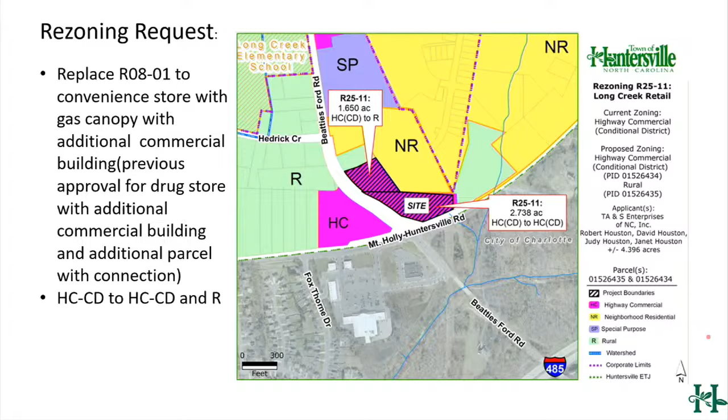As Mr. Henson said, this is a conditional district rezoning of about 4 acres down on the corner of Mount Holly-Huntersville and Beatties Ford Road. Back in 2008, the site was originally zoned from rural to highway commercial conditional district for a drugstore with some outbuildings, and it's been that way since 2008.

You can see the context map here, located at the northeast corner of Beatties Ford Road and Mount Holly-Huntersville. To the west, there's another approved plan for some commercial, and south of Mount Holly-Huntersville is the city of Charlotte. You see the shopping center with the Food Lion, and on the southeast corner there's going to be some construction as well. To the north, we've got the Oak Grove Hill Farm subdivision under construction, as well as some other projects in the area.

As part of this application, they are requesting some modifications. The largest is for impacting the 30-foot buffers. Buffers are supposed to be untouched, but in this case, due to grading, they're asking for that modification. Staff has some concerns with the slopes and the ability to replant, as well as the ability to connect back up to the north if that parcel were to come back in for development.

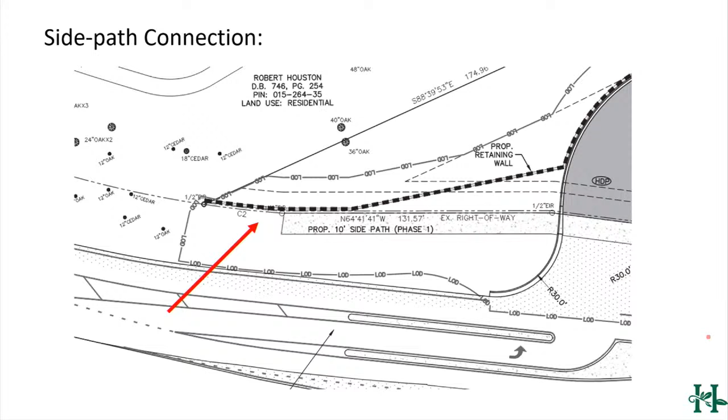In relation to how this plan fits into the Huntersville 2040 plan: it's a great spot for this use, so it's in support of Land Use Policy 5.1, but not supported for several other items listed as well. The biggest thing is if you look at the small area plan, the 2040 plan, this is supposed to be an urban village where things are connected. This property and project is isolated, and we have concerns about its ability to connect to the north.

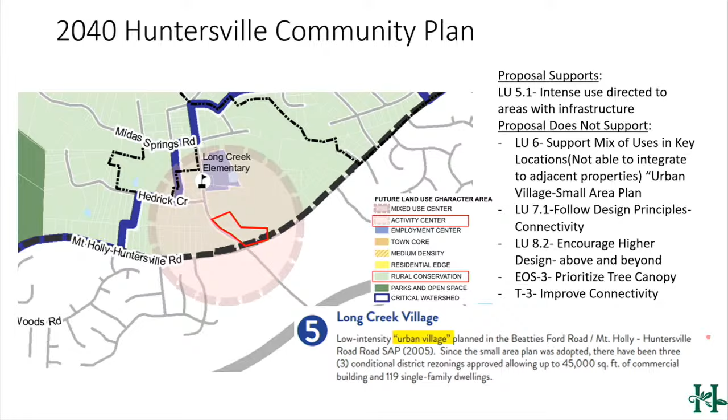So that all being said, staff is not in favor of this at this time. If they were to make some changes to the plans, we could be in support, but that's where we stand today, and I'm here if you have any questions for me. If not, the applicant is here as well.

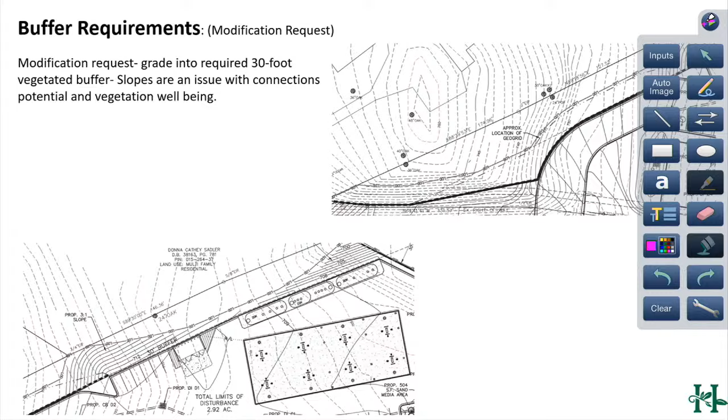So your suggestion would be to raise the grade of the convenience store, the entire lot? Is that your solution? I am not an engineer, and I don't want to play one on TV. But there are things you can do to manipulate the earth to make it less impactful, a better situation, kind of a middle ground between the two parcels.

On that subject, how do you determine the onus of the grading? Would not the property to the north have more ownership since they own more of the slope, if they went to develop it? How do you put the onus all on the current applicant? Good planning and engineering practices.

In the past, we have been at fault only reviewing the applicants and not looking far enough off-site, and there could be negative impacts on those properties. There are several cases where we've been challenged with that. So under my regime, we've taken it under consideration to look at off-site impacts or potential future off-site impacts, to try to mitigate those to a reasonable level. Again, that's just professional judgment. But in this case, the crown is on...

In this case, the crown is on the property to the north, right? Correct. They could shave off, I don't know how many topo lines, maybe five, to get to the same grade as the back of this lot. There's more than that, because you've got a retaining wall that extends down along here.

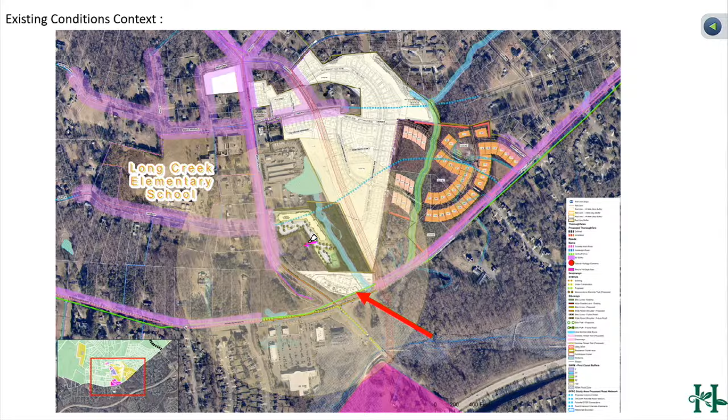Thank you. Yes sir. Michael? Yeah, just trying to align what we're doing at the town level with the state, because usually the state building code would normally dictate what's required in grading. How does what we're doing align with what the state building code will call for when it comes to grading?

There's no issue with state building code and grading. State building code deals with the structure and how it's occupied. No, specifically it says that grading should be done to avoid creating hazards and adverse effects, grading in isolated areas which would not damage the public or negatively affect the neighbors. So they go into a great deal of detail about what grading is and how it's to be considered.

And it's a whole section at the state level. I would think the context may be, don't create something that would be negative, but the connectivity, not being able to connect this, is probably a local zoning code issue rather than like if you were to create something that would wash onto somebody else's property. That would be, I think, a fair assessment.

So if you were to grade this and change the direction of water, it would cause a flooding condition downstream or negatively affect your neighboring parcel. That could be considered in that context.

But you also made reference to a bit of a policy change by making reference to it under your regime. So under the prior regime, how was it considered? We looked at it very isolated. We made sure the project before us was kept whole, but we did not really look at how it could have possibly affected the developability of the parcels next door.

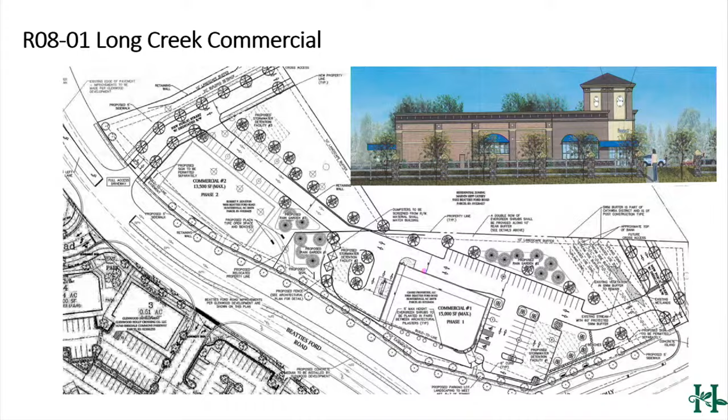As that process played out over time, it became apparent that the Houstons had no idea they were going to develop and couldn't afford to develop the building. So when they figured out they couldn't develop the building, we went to them and said, okay, back out of the proposal. We'll just develop our corner and leave your property as is. And when you get someone to develop your property, if you need an easement to get into our system, we'll give you an easement. But if you decide you want to put a building where that road is, because of the grading you're going to have to do on the property, you go whichever way you want to go. But we will give you an easement to come into us if you want to.

You have to realize at this intersection, it's almost 45 to 60 feet higher from where our building is to where the house is that we've talked about in the past on the Houston property. And if you back up even beyond the Houston property to the Cathey property, that's probably another 30 feet taller.

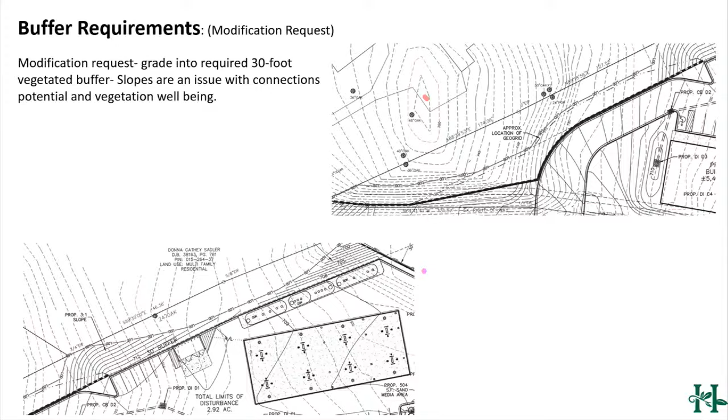Okay, all right, anything else? And same thing for the sidewalk point, we have a grade elevation problem, and we will bond it. When the Houstons grade, we will finish the sidewalk.

Right, yeah, I guess along those lines, the reason we didn't take the sidewalk all the way to the property corner is it's steep, because of the angle of the property line. It's not coming in perpendicular, it's at a pretty sharp angle. So to get that sidewalk in without it basically being... it will not be ADA compliant.

A skateboarder's dream. So are you willing to ask for that modification tonight? Yes, and if we have to bond it, we'll go ahead and bond it until the Houstons develop theirs, and we'll finish the sidewalk. For now, it's just gonna be a steep sidewalk. Wheelchairs will be rolling down it.

Okay, no other questions. Somebody have a motion prepared? Okay, take your time, take your time. We'll keep chatting.

I'll ask a quick question on the traffic impact analysis. I think last time I pointed out the storage as you're coming south on Beatties Ford, specifically in the morning. It seems shorter, a lot shorter than the 2008 plan. It was a couple hundred feet long then, and you kind of truncate it because of where you have to enter that property on the north side. What's the distance of that storage going left on Mount Holly Huntersville, and do you think that's appropriate?

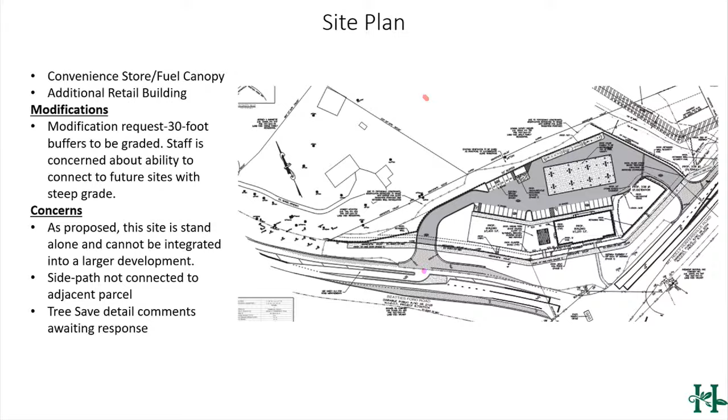I guess my main question is why the dedicated left? Is that a requirement, that dedicated left into your property? Why can't you just have that storage and then have a break in the median going into the north of your property? The left turn lane is a requirement from NCDOT in order to provide a left access into that intersection. So people can't take a left out, I guess. Correct. Right, okay, all right.

Thank you. Okay, I can try. All right, all right.

In considering the proposed rezoning, RU 25-11, the planning board recommends approval with the conditions that future modifications to the grade and the retaining wall would be guaranteed upon further development of the property to the north.

This is essential for guaranteeing connectivity. It is reasonable and in the public interest to approve this request because it is consistent with LU 5.1 of the 2040 plan, allowing for more density where transportation infrastructure and utilities already exist. This gas station will provide valuable services to the existing community.

Second. You have a second? Okay. Question.

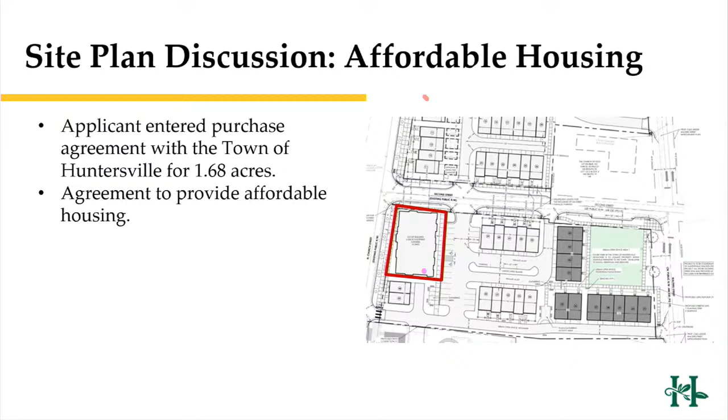And then for the rezoning site, the applicant is proposing 6 urban open spaces: 2 of those will be woonerfs, 2 will be pedestrian passageways, 1 will be a green, and another will be a park. The 2 woonerfs will provide a multi-use access way that prioritizes pedestrians while still allowing slow vehicular usage.

Additionally, those woonerfs will be placed within a public access easement to allow the community to use it as future connections. Staff does recommend that the applicant provide on the rezoning plan how they're going to amenitize their woonerf in order to meet ordinance requirements.

And here are the elevations for the townhomes. And the elevation for the apartment building.

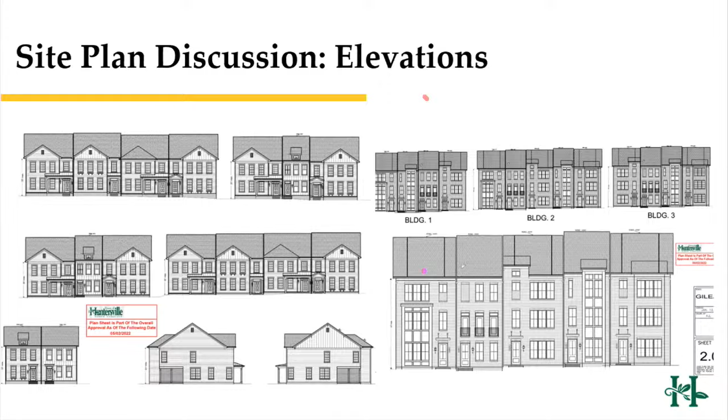So the applicant does have 6 modification requests. Staff is in support of all 6 modification requests. I'll quickly go through a few of them.

The first is to the yard trees. The applicant does plan to provide yard trees only where space is allowed. Next, the applicant is asking to increase the amount of attached housing from 30% to 100%. The next modification is to reduce the required buffer to 0.

The next is to the rear setbacks, which is to allow a variable rear setback that is less than the required 35 feet, and additionally to allow less than the 20 feet of required separation from detached garages. The next modification is to increase the height from the max requirement by 3 feet.

And the last modification is to the on-street parking. They are asking to not provide on-street parking for this attached housing type. Staff, again, is in support of all these modifications as they are consistent with the increased density proposed by the downtown master plan.

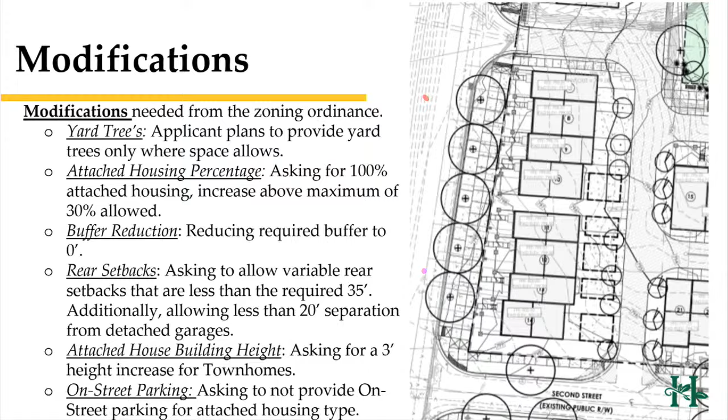And here is the location of the site over the 2040 Huntersville Community Plan. The site is located within the mixed-use center and the town core. These are all the policies that support the plan. I won't go into each policy. One I will highlight is policy LU 8.2, which calls to encourage higher design standards.

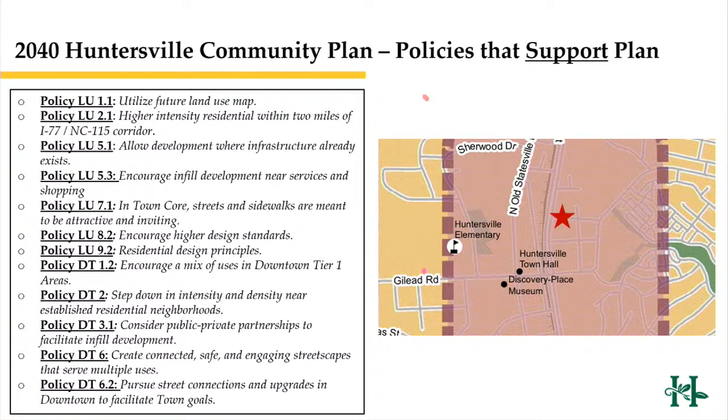As part of that, this site is only required to provide 1 urban open space. The applicant is providing 6 quality urban open spaces while also providing some additional aesthetic elements to the project that go above and beyond the minimum standards of the ordinance.

The downtown master plan also supports this project. The red rectangular box shows the site of the project over the downtown master plan. This area calls for a mix of apartments and attached housing, as well as allowing between 2 to 3, or suggesting 2 to 3 stories in height.

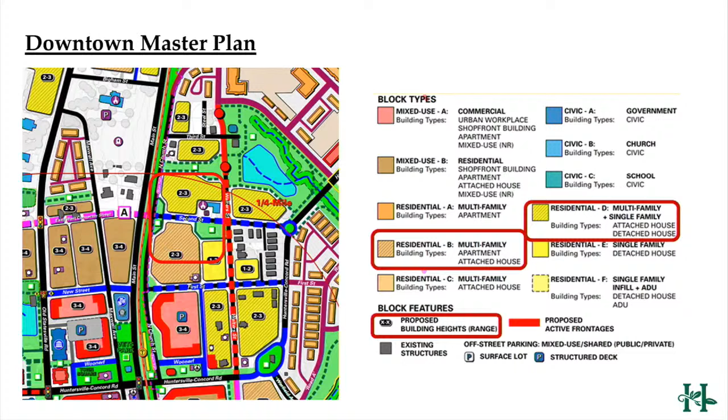The downtown master plan also goes into further conceptual detail, showing 2 connections, one of them a woonerf, as well as a park at the corner of 2nd Street and Walters Street. The rezoning plan does meet the intent of this conceptual portion of the downtown master plan.

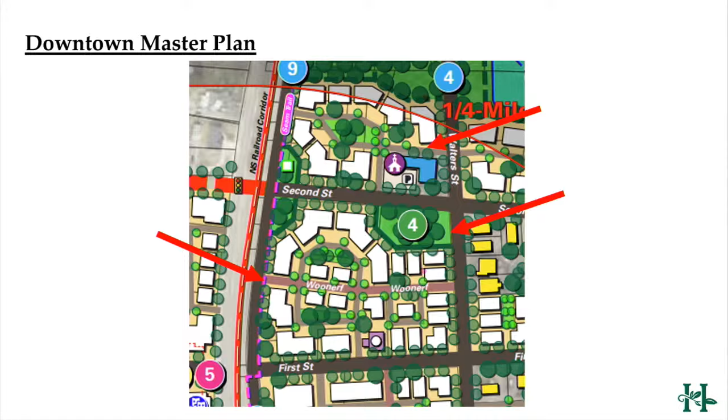Staff is in support of this rezoning. We have just 2 recommendations: one is to provide all of the amenities that are going to be needed for the woonerf, as well as answering all of the remaining staff comments and issues. And just to clear things up, because I believe there was a little bit of confusion, all the stormwater issues that were previously discussed at the public hearing have been resolved. If you guys have any questions, I can answer those for you.

I believe the applicant does not have a presentation, but they are here. Thank you, Nathan. Any questions for staff?

Tell us what you're looking for in an amenitized woonerf. I'll bring up a slide that shows what our ordinance specifically asks for, as well as what our design guideline speaks to. Some of that is providing a surface that's different than just a paved surface, so pavers, something that is inviting to pedestrians and users of the street, as well as street trees or other landscaping items along the woonerf. Those are just some of the few. So you're looking for elevations or something for the woonerf? Yeah, we're just looking to see what they're planning on doing other than just showing the location of the woonerf.

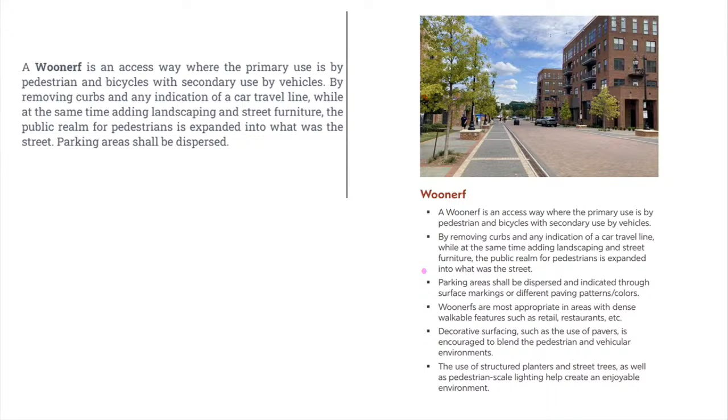I think it speaks highly of the plan when the toughest question you come up with is for the woonerf: is there some way to at least add a design element to it that would reduce the likelihood of vehicular traffic going through more frequently? Sure, so the whole point of the woonerf is mainly to provide safe passage for pedestrians and bikers, but also allowing slow vehicular usage, and by doing that, you're adding bricks, which slow down cars, adding street furniture that prevents speeding along stretches of it. What's included in this application, though? Right now, we're asking for them to show what they're going to do, so to differentiate that.

So the determination was that a TIA was not required, correct? Correct. So I see in the report it states the plan as submitted was for 58 townhomes, and in this current proposal it's 61 townhomes. Is that just an error, or was there a change in the plan? There may have been an increase from the previous submittal, I'll have to look into that for you. I know it's only 3 townhomes, but I assume that wouldn't change the calculus of whether or not a TIA would be required. I believe if they do change it, they may need to look at it again, but I would assume it would not make a difference. Okay, thank you.

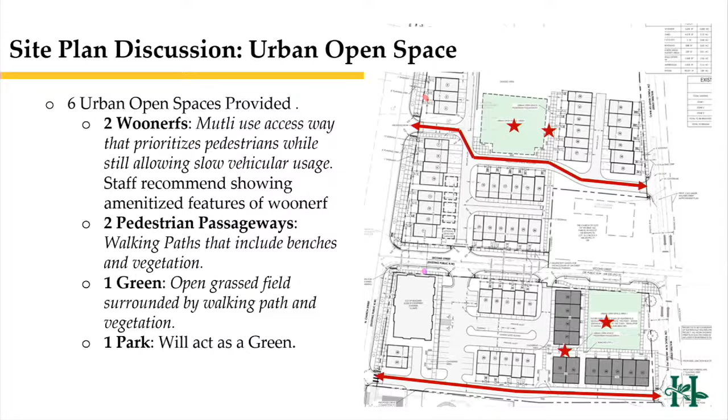So that red building, parking deck in the aerials, that's your property? They're just using it? Well, that's a very thick line, I think that's just a representation, the property line is behind that. That building is not on it, it's completely on the church's property. Well, I was talking about the red building, go back to that aerial, there's a red building to the north of there, red and white.

That's your property, even though it looks like it connects to the church parking lot. Oh yeah, okay, so right where it says 100-109, those two parcels? Yeah, those are currently on our property. Okay, yes, they'll be removed.

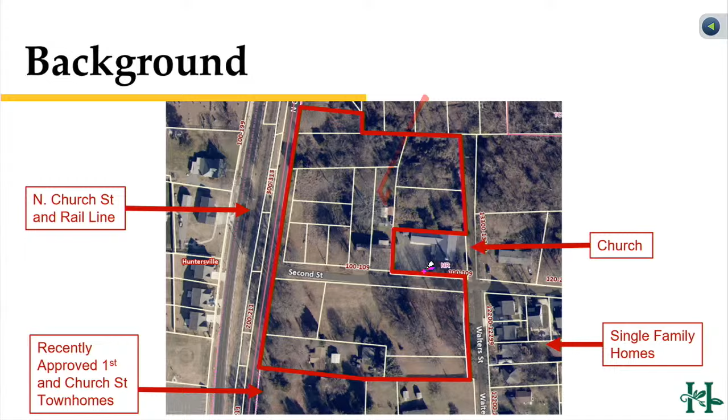So is this the apartments, and is that going to be the footprint? That's the church, that's currently the church. Oh okay, the bottom left, right there, okay. And that's the attainable housing building. Okay, attainable housing, and that is the footprint that is to be?

I mean, it's roughly the footprint, it could deviate. We're donating at least a 7,000 square foot parcel. We have taken a building that represents exactly what will fit in that, with a group that has shown a lot of interest as the recipient of this parcel. Yeah, this is one of a kind, I guess, since we hadn't seen one like this before.

So what's the financial model? It just goes to a co-op and they have it in perpetuity then. And how long is the affordable tag on it for? It's in perpetuity. Perpetuity?

We will continue to work with the town, because when we end up purchasing the property next week, there's clear guidelines of what we have to do. We have to donate to somebody that has to do at least 15 units. We have 7 years to do it. They have to abide by 80 to 120. As we find that recipient we work with, the town will have a say in some of those things, but right now it's in perpetuity. It's not a 15-year or 20-year model.

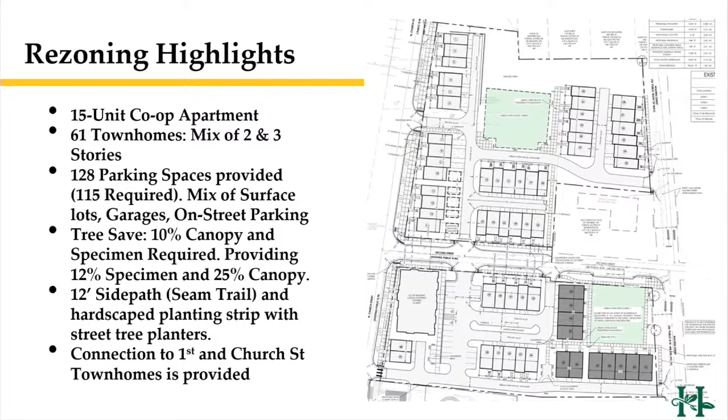All right, any other questions? Can you just give a quick timeline on what construction might look like for this project? With respect to the townhomes, I know the co-op is a little bit of a different story. It'll take probably 6 to 8 months to grade it. By the time we get through permitting, it'll be this time next year will be the earliest we'll probably break ground. From there, once we turn over the parcels, another 6 or 8 months, after that somebody building in 5 to 7 months. So you're probably looking in the middle of 2027. Thank you.

The co-op aspect of it is interesting because those are different kind of creatures than what we typically would deal with, and two things come to mind. One is the actual income constraint. Always a little concerned when you hear income constraint because what it does is disincentivize some people from ever making more money. So is the model to allow transfer of ownership?

That's a great question. That's not something we're getting into on our level because we're going to leave that up to the nonprofit. Our desire is for them to stay in it as long as they can. I know there's other models where you get to a certain income level and then you're kicked out. Right, those will be conversations we have directly with whoever the authority is that we work with. I appreciate that, not a zoning question, but certainly important as part of the project. Thanks.

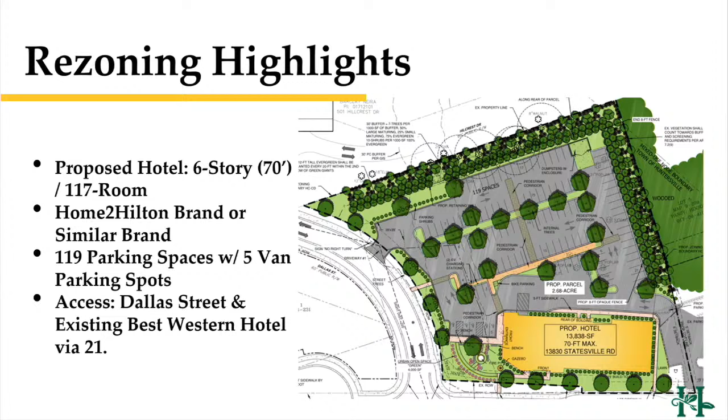The rezoning includes a 70-foot, 117-room Home2 Hilton brand hotel. It includes 119 parking spaces with 5 van parking spaces. Access to the site will be off of Dallas Street and from the existing Best Western via Highway 21.

At the corner of the site at 21 and Dallas Street, the applicant is proposing a 4,000 square foot urban open space, including a fire pit, gazebo, walking paths, and benches. This urban open space is currently shown within a stormwater drainage easement, so we need the applicant to confirm NCDOT is okay with these items being placed there.

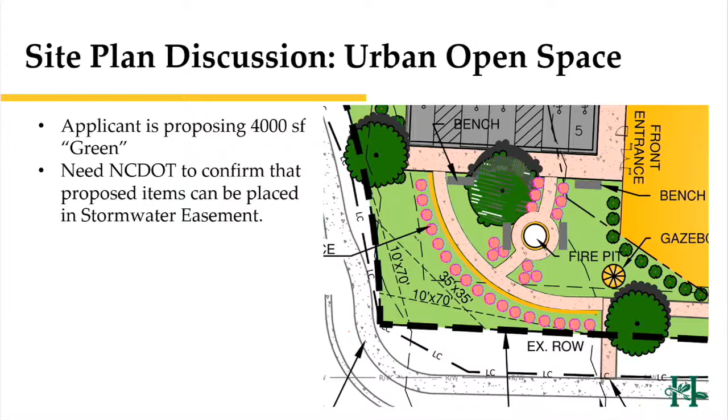Next is buffers. The applicant is providing the full required 30-foot buffers and proposing to increase plantings above the minimum ordinance requirements, increasing the required 4 trees to 7 and the 7 shrubs to 10. Additionally, they are looking to provide a 12-foot evergreen every 20 feet to add additional height to that buffer.

The applicant is requesting a modification to grade within the buffer selectively. Staff could be in support of this modification; we just need more clarity on exactly what existing vegetation is going to remain, since the current landscaping plan shows the entire buffer will be replanted.

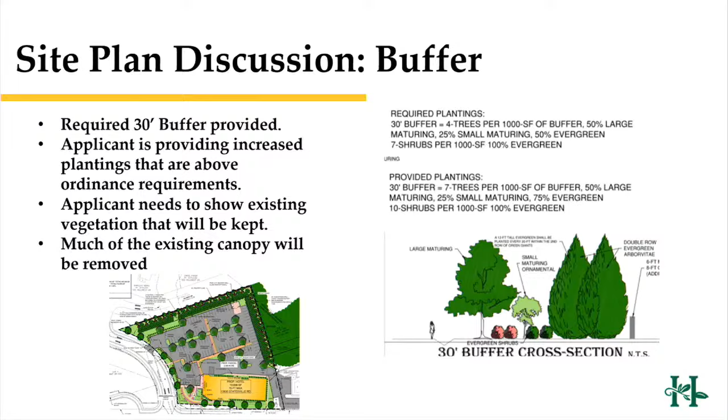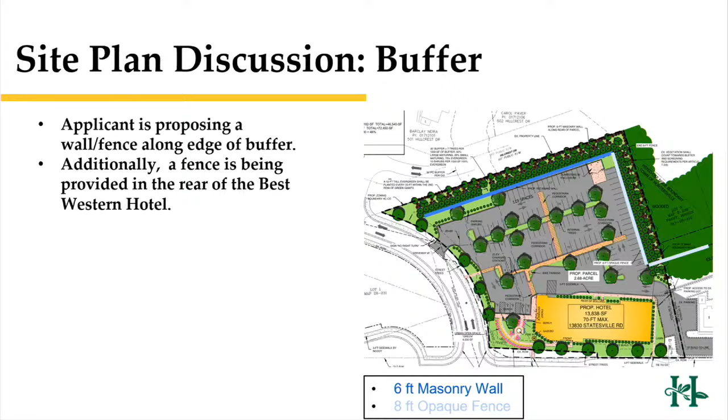A retaining wall is proposed along the eastern edge of the parking lot and that 30-foot buffer. At its tallest portion, it's about 10 to 15 feet above the buffer, decreasing the farther south you go. Staff does have some concerns relating to the retaining wall negating some of the benefits of that buffer.

Some of the initial buffer plantings would be about the height of that retaining wall, and you wouldn't see some of that tall growth until full maturity.

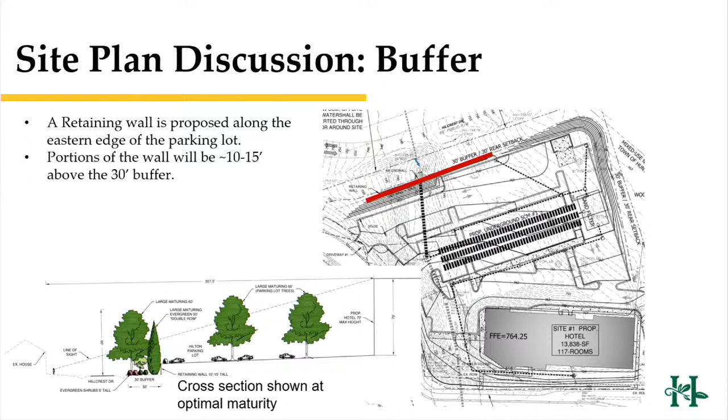The applicant does have 6 modification requests. The first 3 requests involve increasing the height of the hotel from the 36-foot maximum to 70 feet. That increase in height would require a separation between the hotel and the nearest portion of a residential property by 210 feet. The applicant is requesting to reduce that separation to 100 feet. Staff is currently not in support of those 3 modifications, as the increase in height is not commensurate with the decrease in that separation from the residential properties.

Then we have the remaining 3 modifications, which we could recommend or we do support in some cases. As discussed earlier, there's the buffer modification request, which we could support if they provide us some of that information, since they are providing us an increased number of plantings that go above and beyond the minimum requirements of the ordinance. The next modification request is to the hotel location.

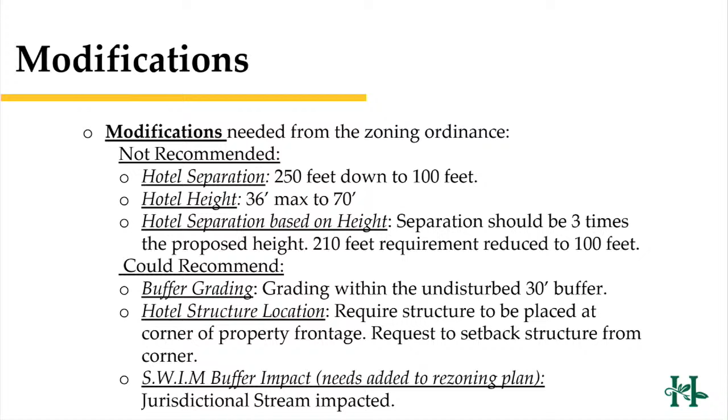The 2040 Huntersville Community Plan does support the use and the general location of this project. It is located within an employment center and on the edge of the mixed-use center future character area. The 2040 Huntersville Community Plan policies LU 6.2, LU 5.2, and LU 2.1 do support this project, as the project's located on a major thoroughfare and within the higher intensity uses that are allowed within the 2-mile I-77 and NC 115 corridor.

Policies LU 8.2 and policy 11.1 do not support the project, as the current design doesn't go above and beyond the ordinance minimums, and in order for that we need the full detailed elevations to be provided. Additionally, the decrease in distance between the residential neighbors and the increase in the height of the hotel are not generally compatible with the nearby neighborhood.

Staff would not be able to support this project without a combination of the following recommendations being met. The first is to lower the height of the building. Second is to lower or adjust the retaining wall and grading so as not to compromise the buffer. Another is to provide a wider buffer, and then provide increased excellence in design, and then to provide that stream mitigation plan as a condition on the plan.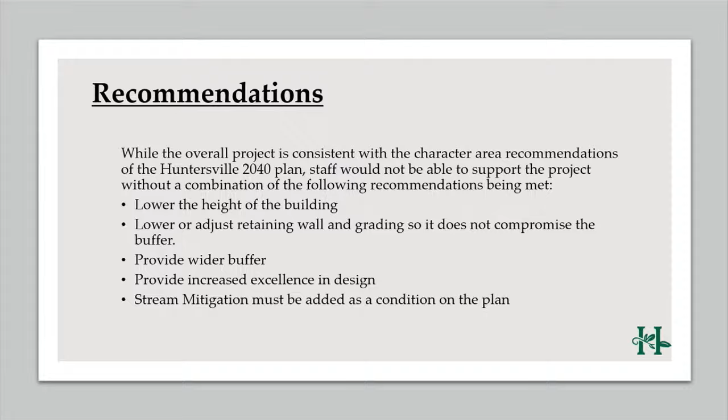And if you have any other questions, I can answer those. The applicant is also here and has a presentation as well. We'll start with questions for staff.

Yeah, the Best Western to the south, do you have on hand the elevation of that building by chance, or approximation? Exact elevation of that. I've been looking through all of our plans and I haven't been able to track that down yet. So that's something we're still looking at. Okay. So that's all I have. Thank you.

Just to confirm, so the house that's currently there, that's immediately behind where this is going to build, that one is part of the rezoning, correct? The plan is to remove that house. The next lot is vacant. Correct. So the first house that we're talking about, it being too close to, is 503, correct? Well, so for the actual zoning ordinance requirement, it's to the edge of the nearest residential property. It doesn't have to have a home on it.

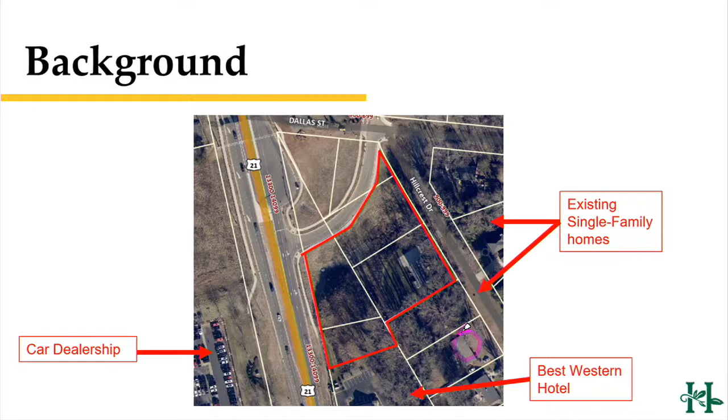But yeah, the nearest house that won't be removed is right here. Right, yeah. Yep, 503 Hillcrest. And that house is closer to the Best Western than this one is going to be, correct? Correct, yep. All right. So just want to make sure I had that. Okay, other questions?

Michael, I'm still trying to form the question. Take your time. I mean, the fact that we're on Statesville, which is kind of a commercial corridor, how does this fit into the full context tonight? Because you look across the street and it's nothing but a bunch of car dealerships, and next door to it is another hotel. Just trying to get a sense for that.

Yeah, so we fully acknowledge that its location along 21 is definitely a positive for the project and for a use of this nature. Currently, our general concern is the impact of the height of the hotel on the neighborhood behind the rezoning site. So it is just a challenging property, given its location.

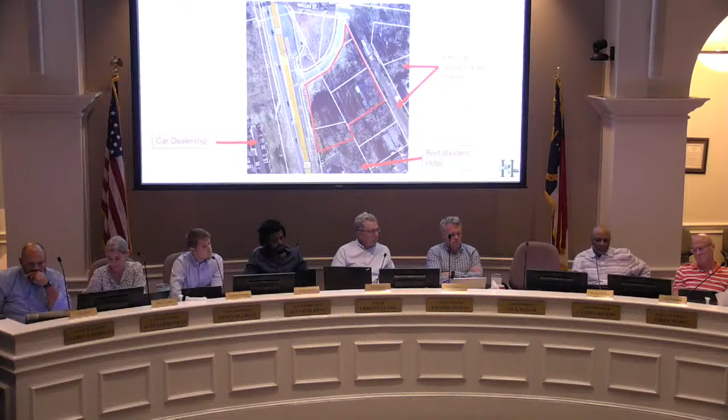So I just want to say, if this were like a smaller boutique-style hotel, you would be for it. If it was 36 feet and they wouldn't need that modification, then yeah, we would likely be for the project. Okay, thank you.

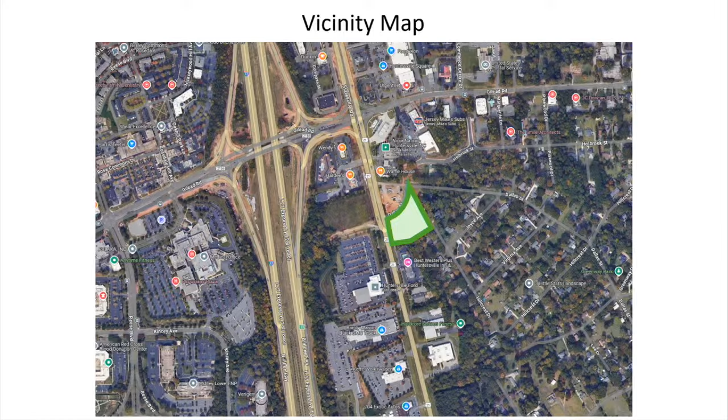I wanted to touch a little bit on the site plan and give you some high points. I appreciate Nathan's summary of the staff report. I do think that after reviewing with staff and going through his report, most of the comments staff has made, the applicant has or will be able to resolve working with staff. The one thing we really can't do anything about is the location of this building relative to the lot.

I'm not sure what it's shown as, lot 5, yeah, here. That is something we could change, and you could make the hotel more at a diagonal. But if you did that, the hotel would then be closer to the 3 lots that are on the other side of Hillcrest. So if you were to change the location of the hotel to this position, you might pull it away from this lot, but then it would be much closer to the 3 lots that are here.

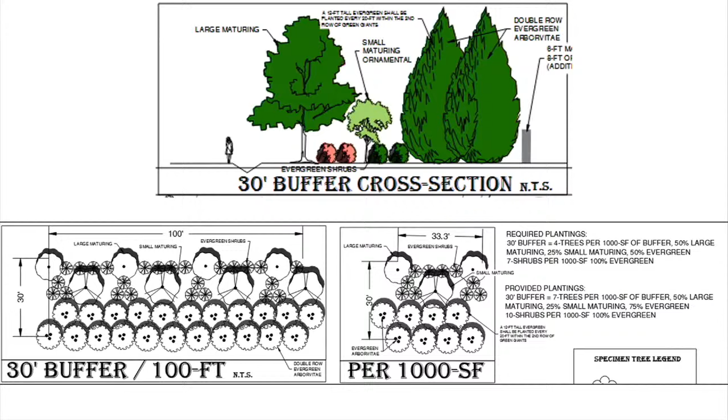The Home 2 Hilton here would be 70 feet from Highway 21. Granted, the highway commercial zoning does have a 36-foot height limitation, but really the purpose of conditional zoning is that it's a unique zoning for each property. We're looking at this property that is unique and trying to come up with modifications that make this property work. This buffer cross-section is taken from the very lowest point of the buffer itself.

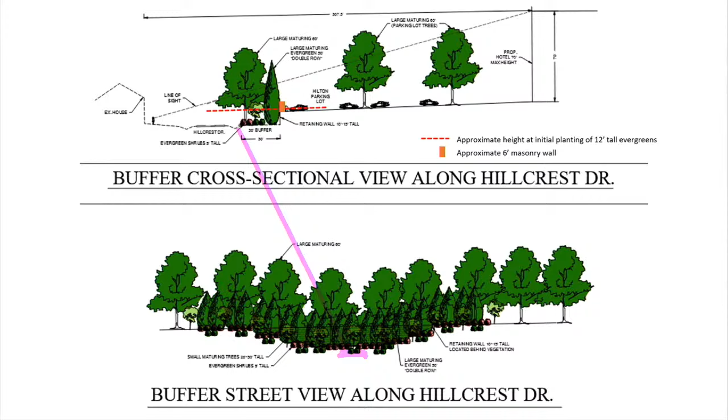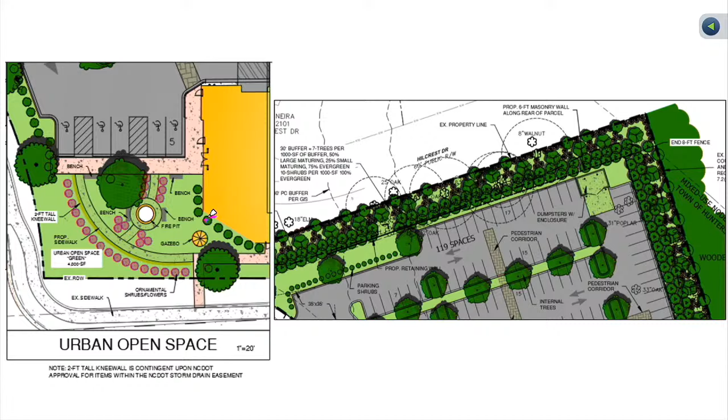Another thing I want to point out is that there are parking islands on this site plan that will also have trees, between the buffer area here and along the parking lot, but then also a row of trees along this island and trees along this island, really additional trees to block out any view of the hotel.

We did talk about full architectural elevations. To do full architectural elevations, you really need to design the entire hotel, and that's a very expensive architectural cost.

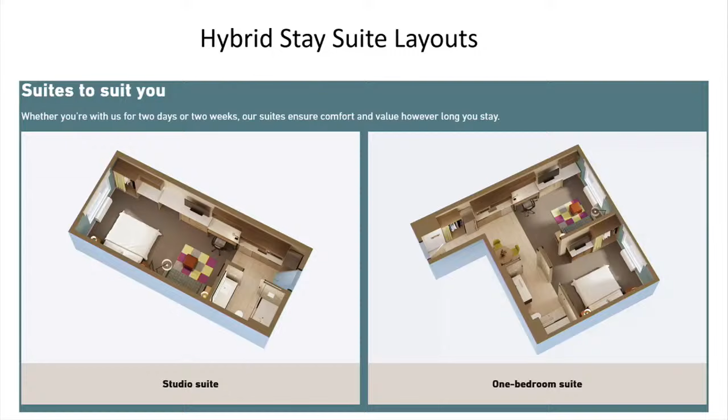Another thing I haven't talked about is the sustainable design and construction materials. This gives you an idea of the layout and why it's a unique hotel—LED lighting, green initiatives, energy efficient roofing materials, a very highly sustainable hotel, which is a requirement of the Hilton Home2 brand. There are also electric vehicle charging stations for all EVs.

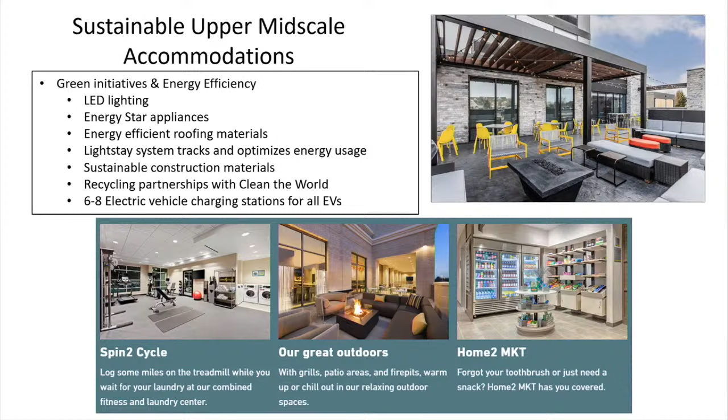I think Nathan did a good job of going over the community plan. This is a great economic development opportunity for the town. We've met with staff and worked on addressing comments, and I believe, except for the height of the building, we've pretty much addressed all of the other comments, and we're happy to continue to work with staff on any outstanding issues.

That's it. If anyone has any questions, I'll be happy to answer, and if I can't, Peyton is here—I'm going to just make Peyton answer all the questions. Thank you. Okay, start, Chris, you want to start?

So how tall is this building we're looking at now? It only looks like about 4 stories, and I'm just guessing at heights, but it doesn't appear to be 70 feet. No, you're right—this building is a 4-story building. The one we'd be talking about, let me go back to that diagram. So this Best Western, for instance, is really a 3-story building, probably only about 40 feet tall, but it's got this huge mast on it. Is that what we're thinking with this 70 feet?

That was another one of my questions. I think what you're looking at as far as the actual height of the Best Western building is probably these roof pitches—that measurement Peyton took to this parapet. If you were to put another roof here, what that would look like—you're probably looking, and I'm ballparking it, but let's say it's 68 feet, and then another 10 feet to the street, so 78 feet even without this parapet element. The height for the Home2 would be 70 feet.

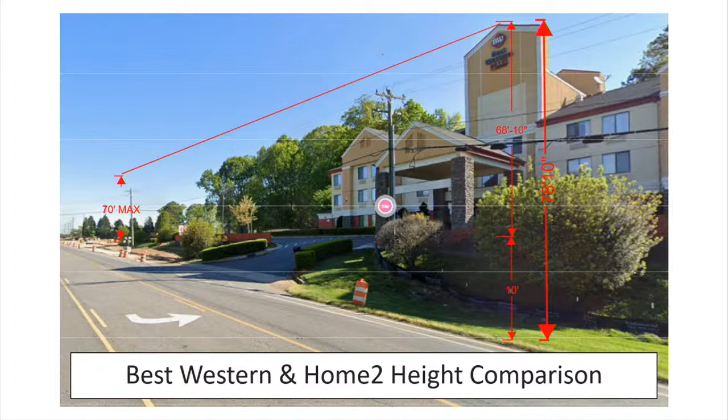So that's what I was going to ask—is the height measured from the street, or from the bottom of the building? The height in this diagram is measured from the street. I see, but is the 70 feet you're talking about measured from where? The measurement for the building itself is generally taken from the floor elevation at the street grade.

Correct, okay. So, going back to the plan view, where you have the fireplace to the north, you talked about turning it diagonally. Was there any thought in shifting it directly north, say 70 feet, getting rid of the fireplace and pushing it away from Lot 5? You're still not encroaching on the ones to the east. Was there any thought there, because that buys you a little more space in your ratio?

Well, the reason we needed approval from NCDOT is because of all the work they've done over here—there's a storm drainage easement here, which would prevent the building from being built there. So there's a storm drainage easement, a considerable amount of work involved. You're taking out that storm drainage easement either way, right? No, the easement stays, you're just paving over it. And there's no modification or encroachment option for that? There's no way to go to the state and get an encroachment? They need to be able to repair it and get to their drainage pipes, and they wouldn't want a building sitting on that—if that makes sense.

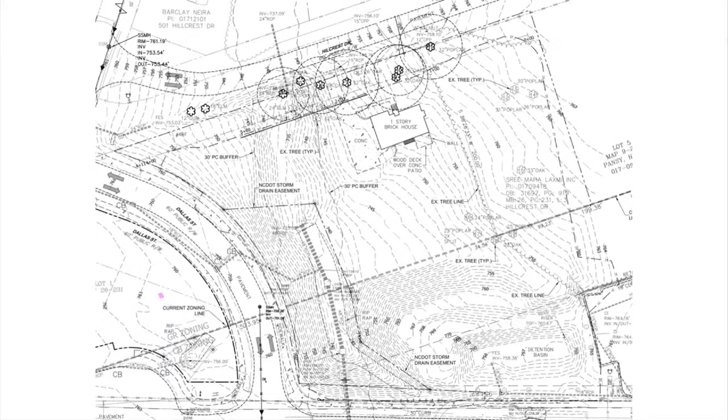It's a 48-inch pipe, it's a large pipe. There used to be a creek through there, and DOT took that creek and piped it. We're actually going to have to take that pipe and continue it up to Hillcrest to help pick up that storm water that's all funneling down through there and get back to the site. That dashed line is an actual existing pipe that's in the ground today.

And why couldn't you move that to the north? We're fixed under the highway there. We could talk with DOT, but I don't think they're going to relinquish their easement. My understanding was that it has to do with the roadway improvements, but you may have had some more discussions. All of their systems tie into that, plus the pipe in the creek. There's a lot going on in there.

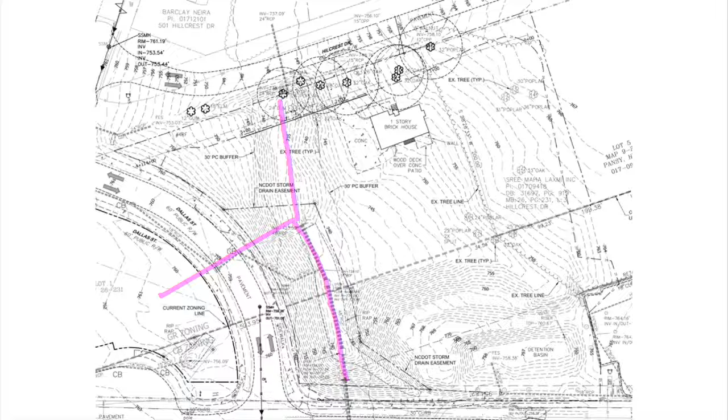I just thought that would be an easier fix. It's a massive building, and you guys are trying to put 5 stories, 70 feet, somewhere where it shouldn't be. So that's not a question, but you can move on. I'll come up with more questions.

My question is, why are we insisting on 5 stories? The Home 2 Hilton requirement here is for that height. I had asked Mr. Patel if he could come down at all on the height, and he could bury a floor, but to get the Hilton brand is very difficult to do. They chose him because of his experience and reputation, and they were willing to give that brand to him and also upgrade the Best Western at the same time. So they do have parameters for what they require. But he could bury a floor, it's just not ideal to do that. I understand it's not ideal, but it might be a nice compromise, especially to the residents nearby. It might be a signal that we're working with you.

So was it just because of the population of Huntersville? Why was there a 4-story built in Boone, but a 5-story has to be built here? That doesn't make sense to me. I don't know the details of Home 2's requirements in Boone, but I do know that's their requirement here. It's the room count, they're just trying to hit a certain room count per floor to get the total.

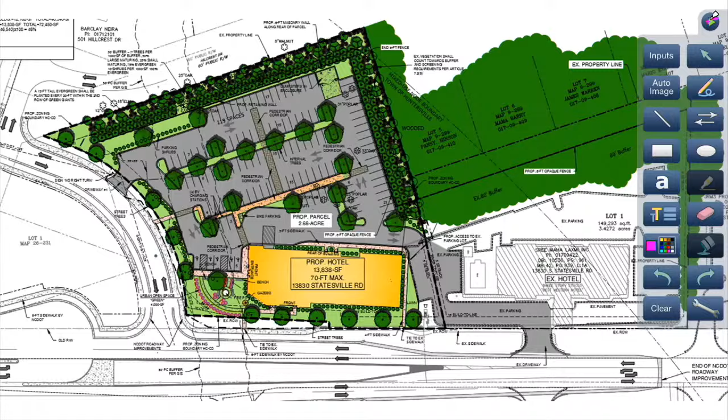The hotel will provide some sound barrier and some visual barrier from I-77 and the car dealerships across the street. When you look at this view, you'll also have the 2 islands of trees in the parking islands, plus the 6-foot masonry wall and trees around the perimeter of the parking lot at the top, plus all of the trees in the buffer itself. So it's a considerable improvement, at least over that.

So I think mine is just more of a comment. One of the challenges or opportunities we want to look at in Huntersville is bringing economic development, which is very important because we are very close to Charlotte. What happens is that most often, towns like Huntersville and other neighboring cities are considered bedroom communities for Charlotte because the economic activity is going on in Charlotte. So what this does is create more economic impact for the town, people who work, employment, all those kinds of things.

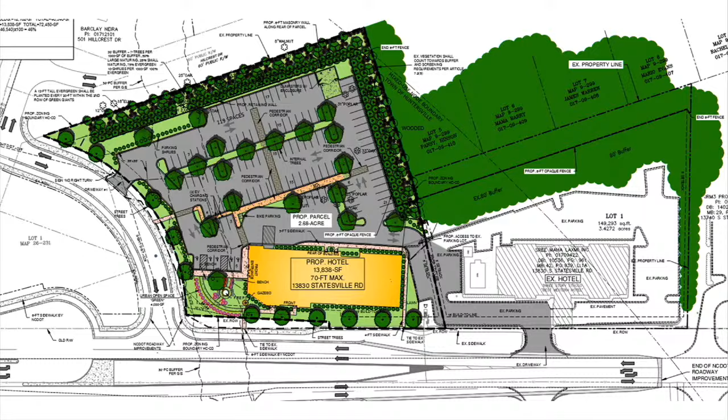This is just an observation. I think as a town and as a zoning board, we're seeing some conflicts that will inevitably continue. We're building a huge amount of density in our downtown with no hotels. That's the challenge. The reason you're going to see these hotel proposals pop up is because people living in the apartments, condos, and townhomes downtown that we're approving and building like crazy are going to have guests and visitors who come to town asking where they can stay. Many will say I won't stay at the Best Western, I won't stay at the Super 8. Where can I stay? And the closest option is four miles away. That's the challenge we have to address. We don't like what we see, but the reality is, as the expression goes, we brought this on ourselves.

Can I clarify my previous statement real quick? While we would still likely approve that, they would still need a modification to go above 3 stories up to their proposed number of stories. This time we would just be in support if that were the case.

Are you muting? Do you have a question? I'm ready for a motion, but we can continue conversation or questions. Any more questions? Then we can get into discussion. Staff, can you find me the slide on the modifications? I think you've got a slide on modification. Hopefully I won't butcher this.

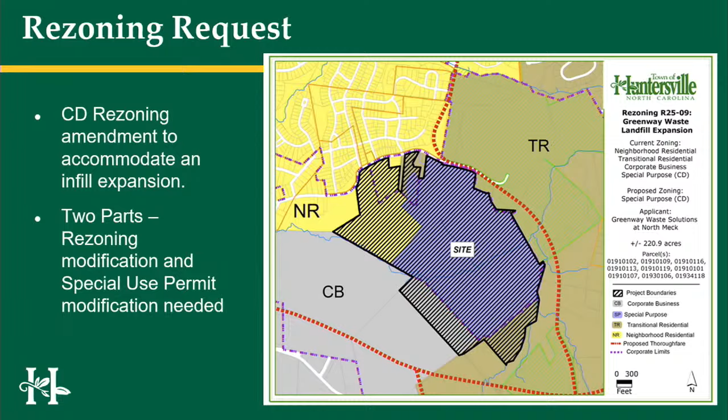Just a lay of the land, not trying to stay too long on the aspects we talked about at the public hearing, but the landfill is at the easternmost part of Holbrooks Road to the south. So you've got the landfill, and the Vermillion subdivision to the north of Holbrooks. Way down to the south, you've got Commerce Station with the rezoning plan you guys just saw and approved a few months ago for the big box warehouse, proposing to expand Commerce Station Drive there to the south.

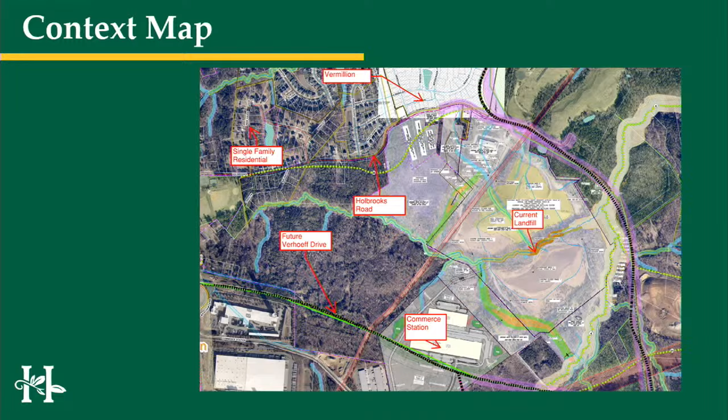Just a highlight on what the application is. The application really is to expand property to the west in order to move the stream that currently runs through the landfill. To the north, you see the current stream in dark green, and in the bottom picture you see the new location of the stream, and where the red arrow is, that would be an abandoned stream. And in the hatched area here, you would have additional fill into the landfill. So it's an expansion almost internally — they're not proposing to expand laterally, east-west or north-south, out of their limits, but the expansion is to remove the stream and fill where the old stream was.

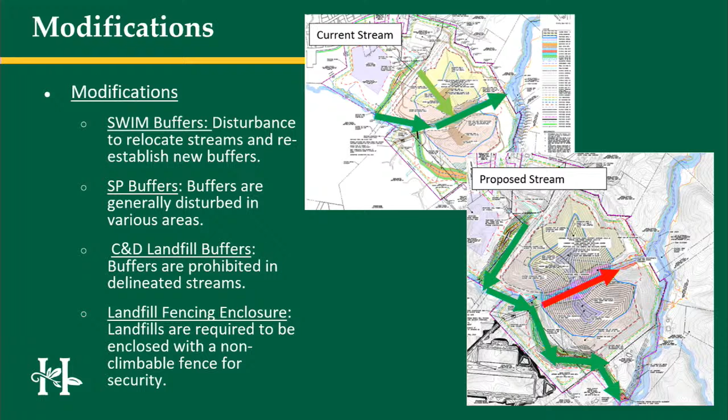No buildings are proposed. So in order to do that, there are some modifications to the ordinance needed. The stream technically still exists there currently, so until they go through the permits with the county and get all those permits done, the stream still exists where it is. Approving a rezoning and a special use permit with the stream still there requires some modifications. Some of the SP buffers are being disturbed in addition to that, so a modification is needed there, and the applicants are asking not to fence in the entire landfill. So that's a modification as well.

Holbrooks Road — a quick history through the development of the landfill. It's existed since 1993, and as the landfill has been used, it's used Holbrooks Road as an access.

Article 9.23 addresses the requirements for construction and demolition landfills, one of which is that they have to be accessed through a commercial street or thoroughfare, not a residentially oriented street. So this has kind of been a non-conforming situation for some time, and the town has been working on trying to help find ways to get the applicant and the landfill off of Holbrooks onto a different street.

Back in 2016, when the current special use permit and conditional rezoning was approved, there were conditions that limited the use of the landfill to using Holbrooks no later than 2034. That was the threshold date where they needed to find an alternative access, and they agreed to that. Additionally, if an access became available within a year, they would change their access to that new access.

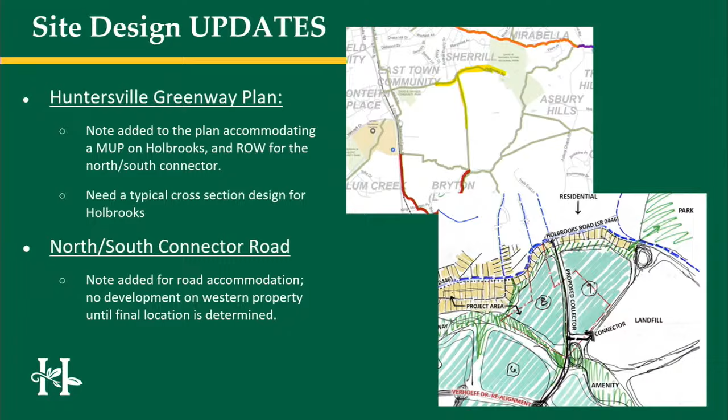Also updated regarding the ULI study, the Urban Land Institute, and the East Huntersville Small Area Plan, which called for some residential use. Again, Holbrooks has been a residential street for quite some time, so those plans in our library essentially call for Holbrooks Road to remain residential in nature. So the applicants did change their rezoning boundaries to back off of rezoning the entire properties, to leave room for residential along Holbrooks.

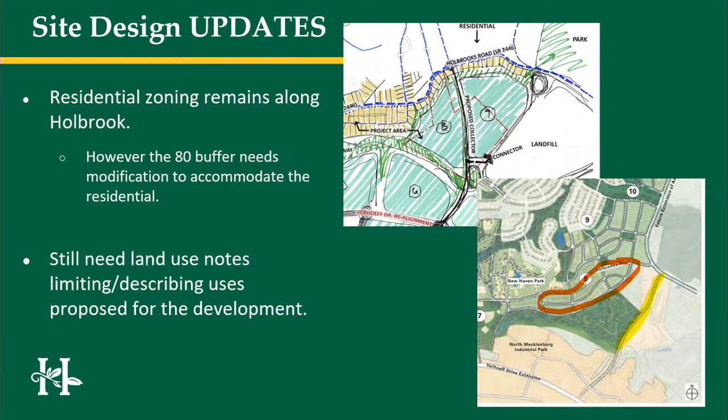So that's a good thing; I think that was necessary to really be consistent with our long-range plan, so they did that. We're still working with the applicant to get notes identifying specifically where specific uses are around the development, to make sure we're concrete on what uses are proposed where, and also making sure the 80-foot buffer along that new residential area along Holbrooks is accommodated. So still working on that.

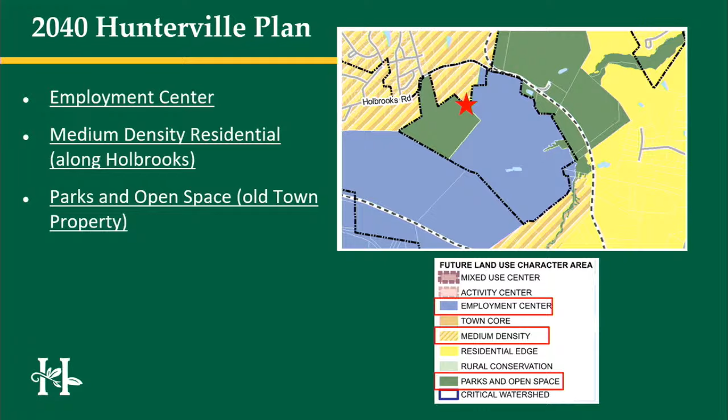The residential, medium density there along Holbrooks — that's where the applicants recently changed the plan to save some of that residential along the Holbrooks Road corridor. So we think that fits there. The parks and open space — that was back when the town owned that property, and there was a general plan to perhaps turn that into a park, but the town has since sold that to the applicant, and they've got potential plans to use this for industrial development in the future, which would probably be appropriate per the ULI study that recommended that type of use in that location.

So, consistent policies — again, just mentioning the future land use map, all those uses, especially with the updates, are consistent with LU 1.1 and using that future character map. EOS 5 protects water quality. Again, having a stream go through a landfill is not the best for water quality, right? So redirecting that out is a win for surface water quality.

Inconsistent policies that we're working on, again, so focus more intense development in locations that can support growth. We're really in a situation where Holbrooks Road is not ideal to have access for heavy trucks going through residential areas. So the applicants are working on that, so that's a work in progress.

Same goes for LU 11, protecting existing housing stock. Again, the residential developments that have been on Holbrooks for a long time are dealing with that truck traffic going through there, changing the character a little bit. So we're working on getting that taken care of.

EOS 1, preservation and enhancement of the environment. This is something where we're going to have to work through the special use permit because the site does have some chemical contamination and cleanup is underway. So we're asking the applicant to show evidence of the cleanup and evidence that the location of the new stream and additional fill in that location is not going to hurt the environment generally. So that special use permit, we're working on accumulating that information from the applicant.

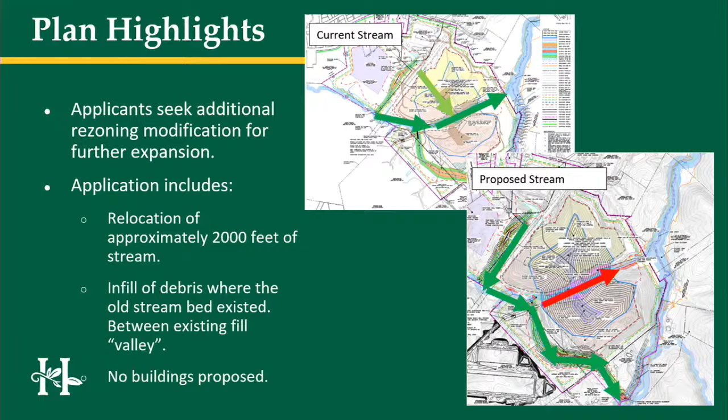I think there have been some chemicals seeping into the ground, and have there been any comprehensive health assessment done to understand the impact for residents in the area? And now that you want to add another landfill expansion, so have there been one?

So they are working with North Carolina Department of Environmental Quality, NCDEQ, on the contamination cleanup. They're working on that, and they're actively mitigating and trying to clean that up. Now, they can talk to, in regard to the special use permit, staff is kind of asking for that information in regard to, okay, we know there's existing contamination, we change the stream, then we add fill on top, how does that affect things? So that is during the special use permit process, we're going to answer those questions and then have them present those answers to the town board.

We want to see that first to understand what's going on as to the extent of the contamination before we talk about improving or extending new expansion. Don't you think we should consider that first? Yes, yes, and from the staff perspective, that's why the recommendation for approval is conditioned on that special use permit being approved, and during that process we would expect those questions to be answered. That's going to have to be submitted, and we'll review it, and then the town board will be able to look at it to make sure those questions are answered appropriately. Theoretically, we could approve this tonight, and then the special use permit gets denied, and then nothing would happen. Correct. Okay, that makes me feel much better, thank you.

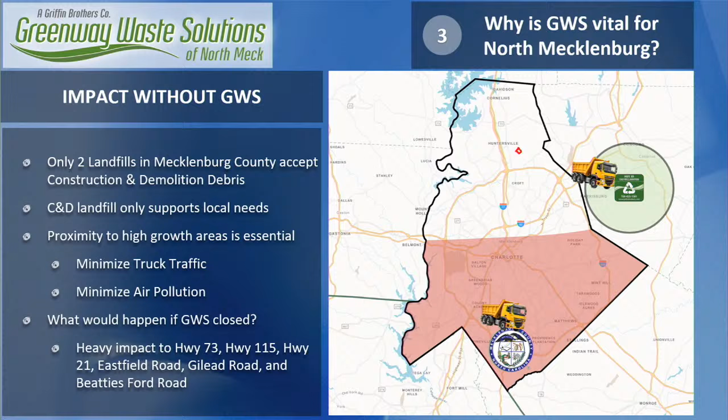So we did an analysis of what that would mean, with the obvious heavier impact of truck traffic on the key roads, as I mentioned, but also air pollution. Having our type of facility minimizes that, because the way C&D waste works, it's one container in front of a house or a commercial property being built. That has to be picked up and taken directly to a landfill - it's not consolidated like household waste is. So that one pool allows us to do analysis.

We estimated another 725,000 annual miles of truck traffic would be generated for non-existence, and by arithmetic that's 2.4 million cubic... additional pounds of CO2 that would be in the atmosphere. And illegal dumping would be more commonplace if you don't have convenient sites for waste.

So what's next for us in conversation? Brad did a great job really explaining what we're doing, but I wanted to use a little bit more animation to better explain the technical stuff. I'm also happy that we have Todd Gingrich - one, if I screw up, he's my engineer to tell me where I screwed up, but two, he'll get a lot more technical with the constituents that were mentioned. I did want to talk about the cell tower that was approved a few months ago.

The tower's up, and AT&T would be first to have service. So if you live in Vermillion, AT&T is probably your better option. Soon after, Verizon and T-Mobile will most likely be there.

Our land is noted in magenta, and you can see cell 1, which is closed, and cell 2, which is active. I'm going to do some more animations.

The Verhoeff Drive extension that we approved, that's where the alignment approximately would be, but as we know now, it ends at Southwire. Also, stormwater regional management.

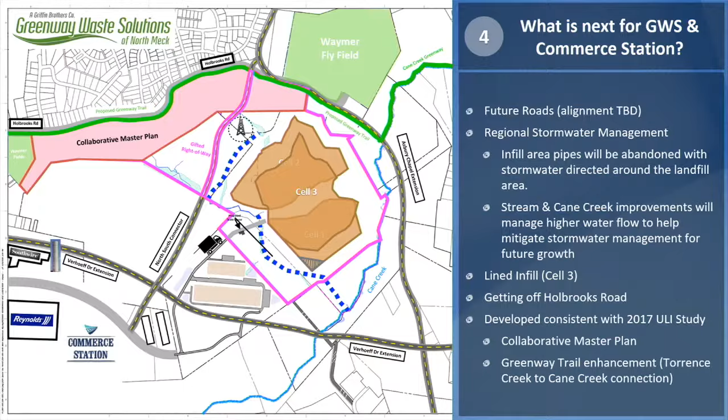Most of that would obviously be coming back to the town for the collaborative master plan. But as Brad mentioned, the parcels that would be currently affected as a result of this proposal, we would do that as a part of this, but we'd hopefully have it all coordinated together.

Just another cross-section of what this would look like. As you can see, cell 1 or phase 1, and phase 2 or cell 2, those are existing. This would be filling in between. The first 10 years, we'd start at that 680 mean sea level and come up 70 feet, and you'd keep coming up until we hit a peak of 865, as I've referenced. You can see how that would be designed.

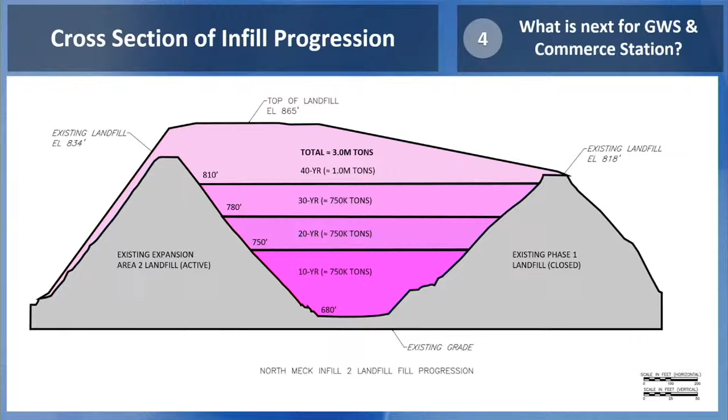All that area in purple would be lined. It's almost like the equivalent of a bathtub. Any water that hits waste would be captured through a pretty sophisticated system you'll see in another slide, and that would be taken to a huge tank, monitored, and then properly discharged in the proper way. So, a totally different state-of-the-art system.

An interesting thing about groundwater in our region is it moves roughly 5 feet per year. So with our minimum buffer of 200 feet, there's 40 years to remediate any type of significant problem that may happen. Obviously DEQ would respond way quicker than that, they don't wait years, they wait days to respond to an issue.

Per DEQ's recommendation, they wanted me to give more information. That was one example where, even though we have 40 years to remediate a problem, the remediation process happens immediately if a groundwater test shows there is a problem.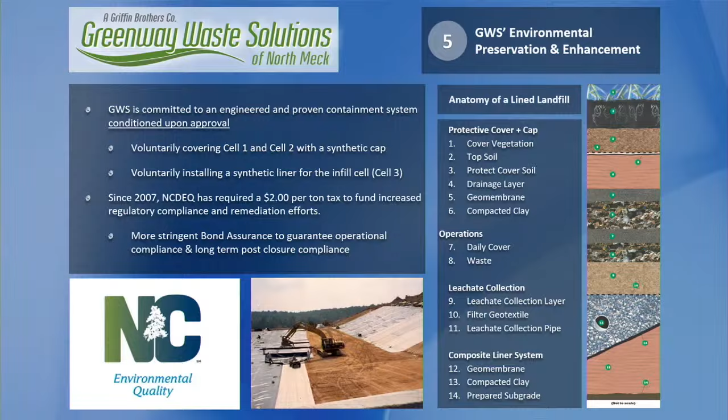Hopefully what we can do is answer questions, I thought I was going to go quicker, but I didn't. Hopefully we'll be able to answer questions related to water quality and highlight the things the county and DEQ have done with water quality, and the support we have from the river keepers. Thank you for your time, apologize for taking so long.

Thank you. Okay, do we have questions?

So currently you're C&D, you're not lined. Is there any aspiration to go away from C&D now that you're going to be lined and have such a robust system? No. Matter of fact, I think by this SUP process, it would be well understood that it would just stay construction and demolition, and any change like that would require a new approval by the town, and obviously approvals by DEQ.

This is more of a logistics question. So C&D, right, you put a dumpster out, and it's supposed to all just be wood and lumber, and occasionally somebody throws some household trash in there. How do you capture that?

And I assume that has something to do with that high-tech facility where you're separating some stuff out? Yeah, great question. So probably 95% of our business comes from the same haulers that manage construction and new construction houses. So when they pick it up, they do a quick glance at what they're picking up. If there's been a pretty big violation, they take that waste straight to the MSW facility, and the closest one is at Charlotte Motor Speedway, run by Republic.

So if there's been what I would define as negligence, where somebody's put the wrong product in the container, they wouldn't bring it to us. Now, when they bring it to us, they have a tarp, and the tarp comes off, and we have cameras, so we can also make sure they're not bringing in the wrong thing. That's kind of the second point of check. First, the customer, and second.